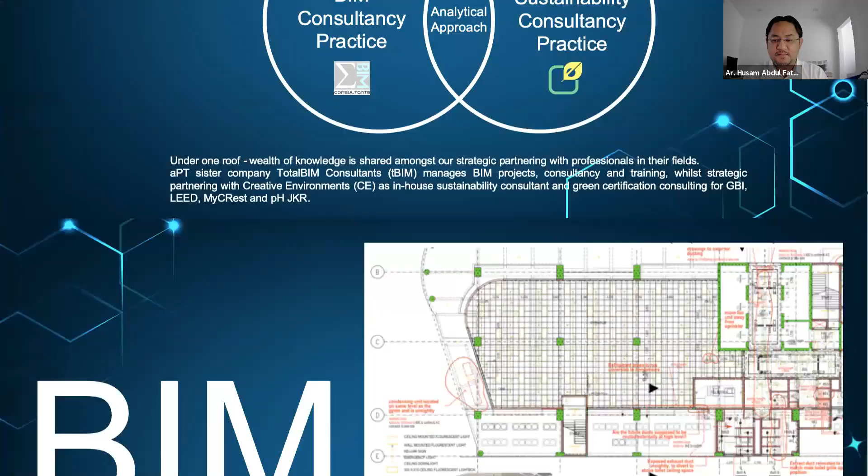So I think everybody knows what BIM is. Basically, it's an accurate virtual model of a building digitalized for construction. This model is known as the building information model, so it's not so much about the model, it's more about the information. Once you have a lot of information in the model, you can use it for planning, design, construction, and operation of the facilities. It helps architects, designers, and constructors to visualize things, and you can do everything.

You can do a lot of things in a simulated environment before things get built. So the potential for BIM is actually enormous, and we've been doing this for a long time. I've been doing it at least since school, and Gary said he's been doing it since 1991, and even after 20 years...

The movement of BIM in the industry is still very, very slow. So we would like to see that, if it's done properly, it not only makes your job in the office faster and easier with fewer mistakes, but it also helps speed up the projects on the field.

Now, before I start with my slide, I have a video presentation set up by CIDB Construct. It will take 3 minutes, so let's enjoy.

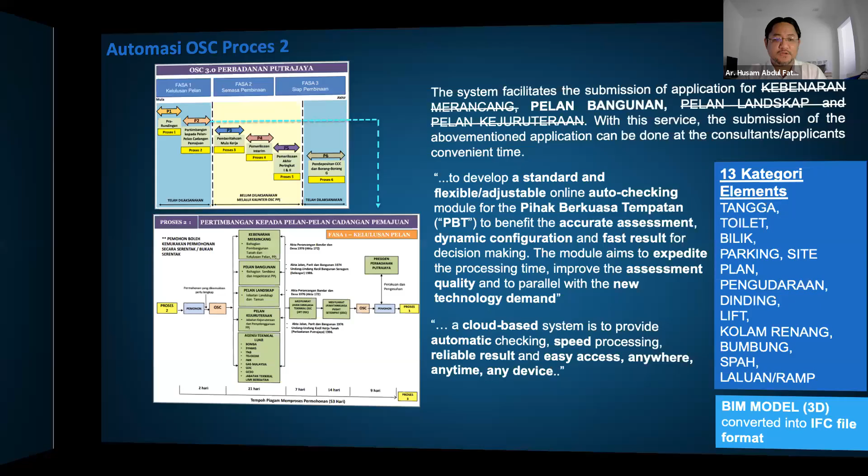So the development and programming of the NBeS system is basically looking at tapping into the OSC process. There are 6 processes in the OSC system, and the BIM e-submission is looking at only one section of the whole process, within process 2.

In the initial stage, there was a meeting that was done, a full workshop. We were not involved, obviously. And 13 categories from the bylaw were picked out for it to be tested.

But once we developed the system, we basically expanded it, and I think we've covered the entire of UBBL 1984.

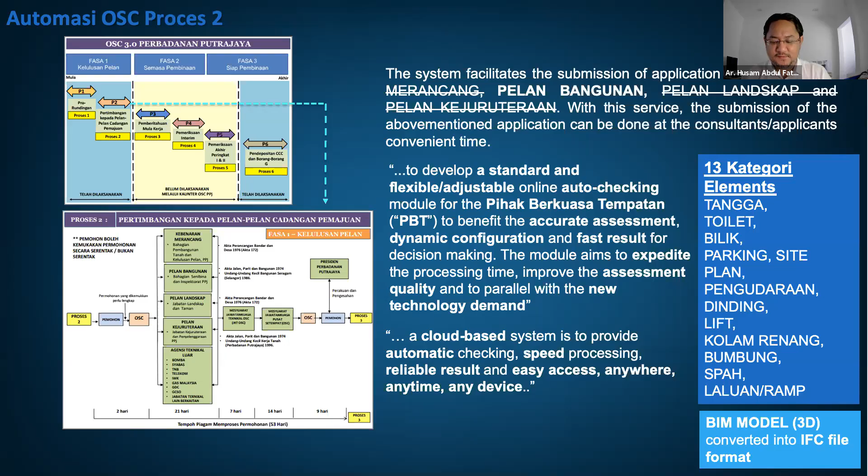So the NBeS system is focusing only on process 2. And in process 2, you have the planning submission, land matter planning, building, and everything else. But because most of the other parts, although they wanted it all to be digital, it's very difficult to focus. The direction given at the time is only to focus on building plan submission, looking at building department and also fire department.

So this is largely looking at the Street, Drainage and Building Act and also the Uniform Building Bylaw. It started off with 1984, and then we expanded it to 1986, 2012. We are also in the pipeline to update it to the latest version of UBBL once it comes out.

So you have the plan bangunan, that is what we are looking at. We're not looking at any other things.

But the provisions from the planning will actually be included in the submission of the building plan. So there will be items like how many car parks you need to put in, what green area you need to provide, and whether you need to provide spaces like tadika, surau, and all those things. All of the requirements that the project will have during the planning stage will be embedded as data into the model, and obviously it needs to be modeled. The functions of the system will check against the data that has already been given during the planning stage, and also all the items embedded into the UBBL for the building plan assessment and also for the fire checking.

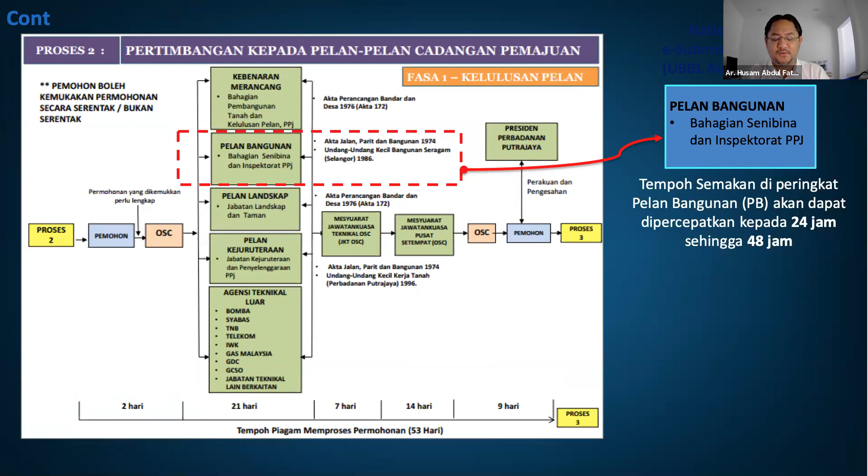So since 2017, what they're trying to do is, once you put the model into the system, the model gets checked automatically, and you'll be able to get your result out within 48 hours. When it started, it was 100 and something hours, then they tweaked the system and added some capacity, all those IT stuffs. Eventually, we had one project we tested that could actually get results within less than 48 hours. That was very, very impressive.

In terms of the documents being reviewed, obviously in the beginning we went on the more basic, or easier buildings or purpose group. We focused on single residential, then we moved into residential buildings for high-rise without any commercial attachment. So basically, we reviewed the UBBL, the standard 1184, and later we also included 1183. For other areas, we also reviewed against their planning requirements and also the fire requirements as well.

In order for us to do this, when it was first rolled out, the test pilot was given to 4 local authorities, which is PPj, MBPJ. They wanted the big PBTs, and they also wanted a smaller city, so we welcomed MPKj Kajang and also MBMB, that's Majlis Bandaraya Melaka Bersejarah. For all of these PBTs, they selected a project and we ran a test project, an actual project, as a pilot. All of this process has already been completed, and CIDB is in the process of coming out with a report for the industry and also the public to review.

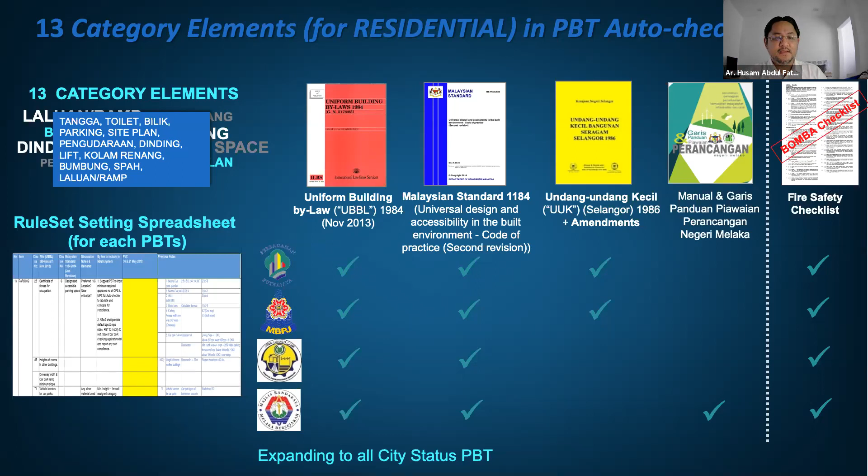Now, how do we do the testing for Total BIM? Basically, we focus on the modeling side of it. We check the requirements, we tell the programmer what the requirements are, and we model it based on that requirement. So what the programmer does is use the words from the UBBL and turn that into sort of like a word search kind of thing. Basically, that's a simple logic of the system.

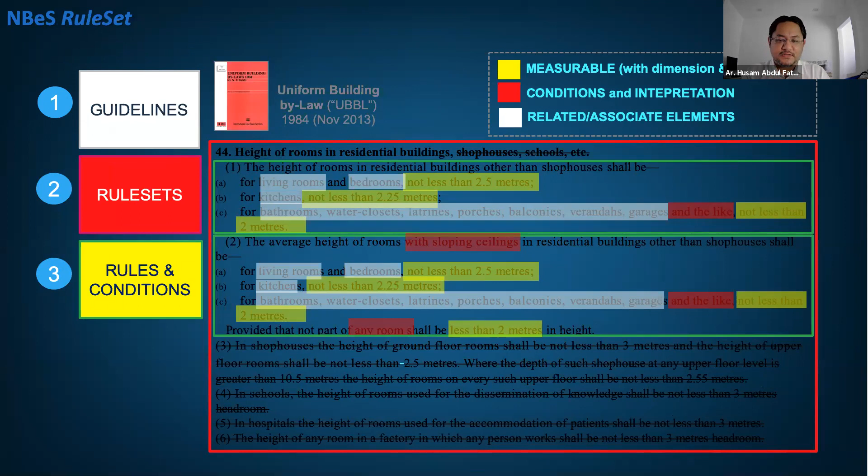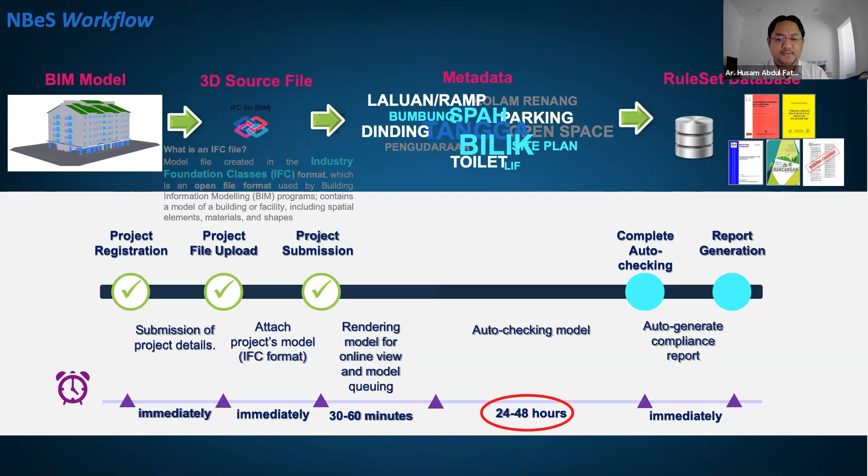And then we'll do the auto checking, and the report will be generated in a PDF format. The time is expected to be completed within 24 to 48 hours.

So you'll get an ugly looking building like this. The color is obviously off because it's not ours, the system basically sets the color to the model. We're trying to look into how to make this look as how it was designed, because this is what the local authority will be seeing once the IFC model is regenerated into their system.

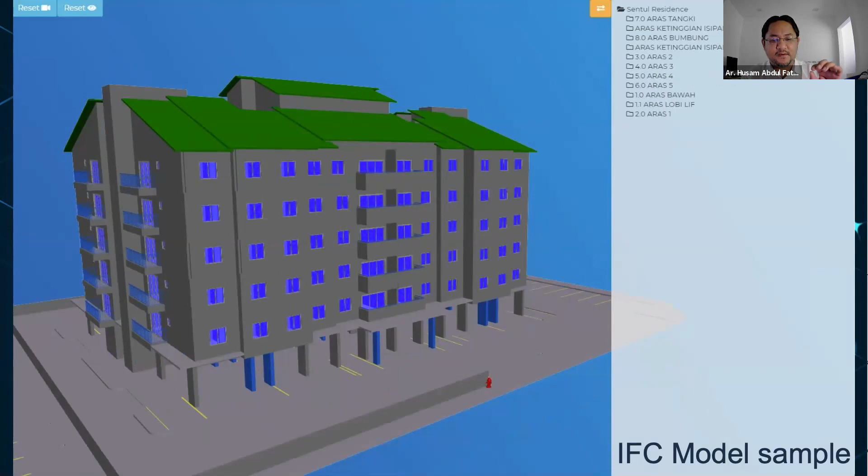And this is a model that will be tested. All of the components are actually selectable, and then in the system it will come out red and green. The ones that failed, you can actually click on them, and it will go into the page where it shows where the error is and which location. It will highlight what value is required based on the standard and what value is given. Very crude, but I think it can work.

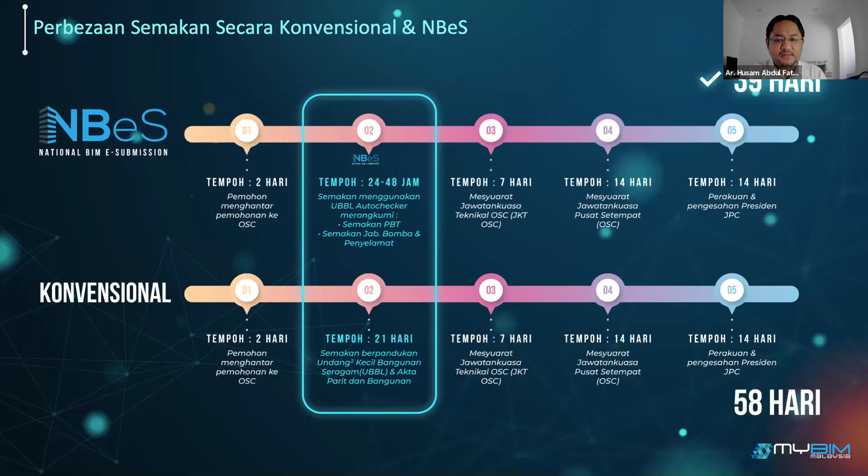And they're looking at reducing the process to more than half if it's possible. So the benefits of this is that you get to really expedite the checking process.

So what NBeS does is that it allows the PSP to run the model test on their own. And then once the model has been cleared from all errors based on the computer checking, and also the ability of the PSP being a competent person who knows the requirements, so he's certain that the design is compliant. The system says it's in compliance, and then they think that they're ready to go and do the submission.

The submission at the local authority will actually rerun the test again, and then they will make sure that the result comes out the same. And based on the discussion, a certificate will be given based on the computer testing, and that will be your building plan submission and your approval.

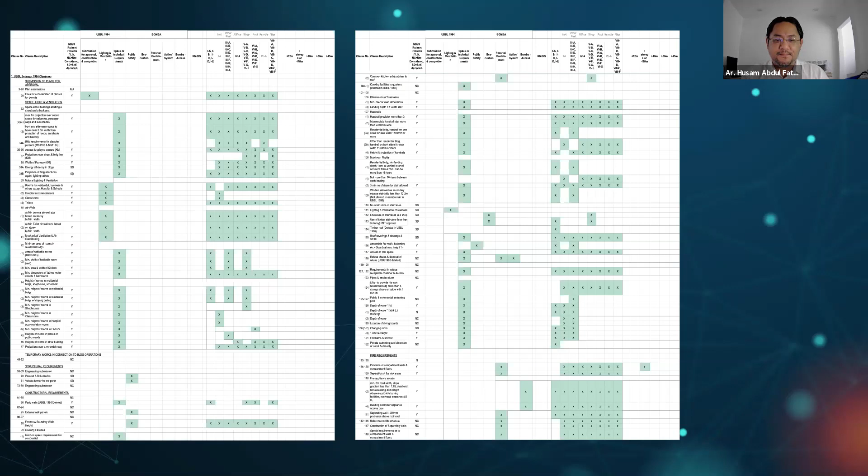Those PSPs who are already BIM capable, it is just a change in their standard only. But for those who are very new, who are not yet well-versed in Revit, they will be struggling a little bit, because you really need to be at a certain level of BIM competency in order to use the system and the template. But once you get to know this, you'll be able to see all of the clauses and all the compliance criteria already embedded in the UBBL standards, and also the building guidelines and planning guidelines.

And it can be applied to a broad-based building type. So we've tested single house residential, terrace houses, shop lots, double-story, three-story, single staircase, double staircase, multi-residential. We've also tried low-rise commercial building, high-rise commercial building, and we're going into mixed development now. So although the system is still very, very new, it is also very, very robust.

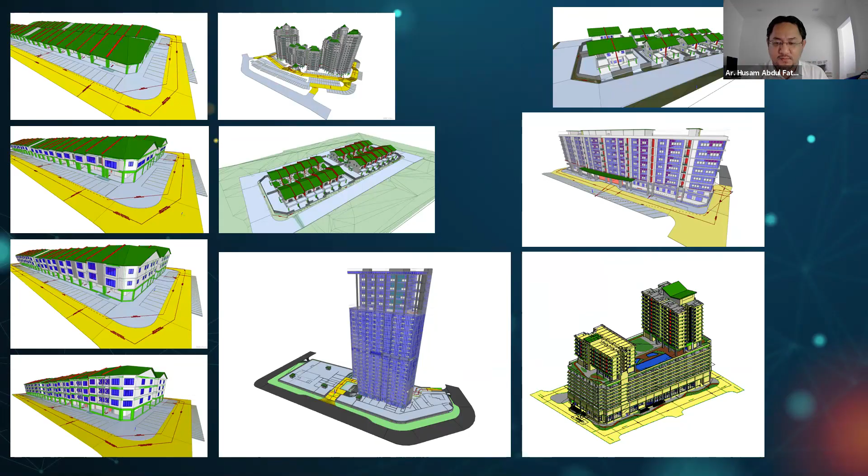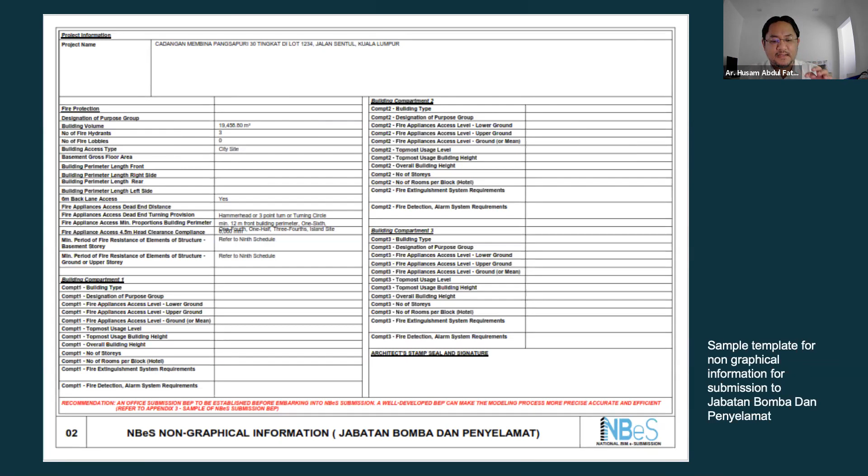And what you'll need to do is, inside Revit, once you've got the template, you need to fill in data. These are non-graphical data. So you basically take from your UBBL, from your planning approval, from your building plan requirements, and then you have to key in all that information like number of car parks and all that. That will actually be used to reconfirm your model. So there's a few of these.

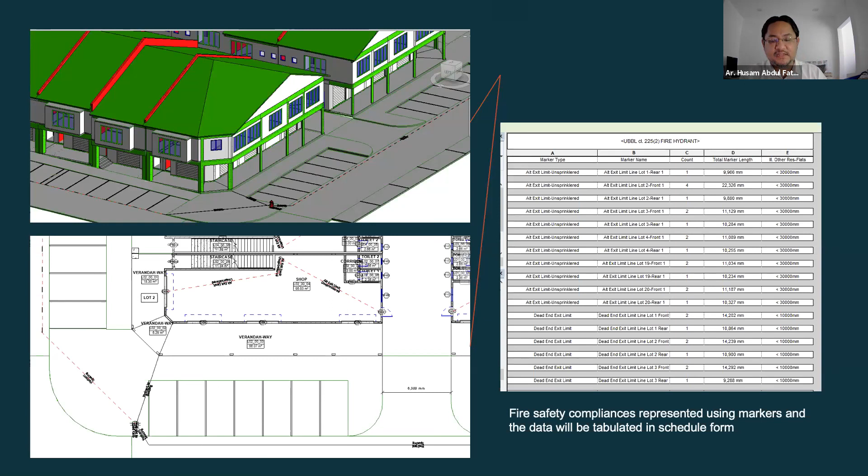And the system automatically generates schedules. So you can know the number of hydrants, the distance between hydrants, the distance from the hydrant to your building. Do you actually have that maximum 30 meters? What is the distance of the hydrant to the center of the road and stuff like that? Everything will come out in a schedule that in the office, the PSP can open up and review whether the information is correct or not. Because PSPs don't really do the model, so they would rely on the technical people.

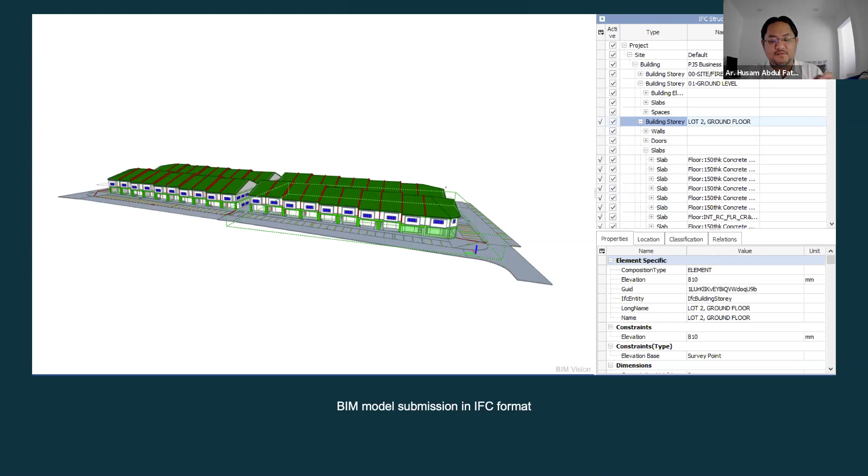And you will also be able to check on the slabs, the actual components, and what things are. So we have already assigned in the template all of the IFC formats, so that once you model with our template, all the information that you need for the checking is already embedded. We also check on site compliance. You can check the height, you can check the building volume. You need the volume in order to assess the fire appliance access.

Then you can do the calculation of your perimeter. Then you know what is the fire appliance road, whether you need 1/6, half, 3/4 island site. So all of that will be calculated within the system. And if you don't comply, then it will come out red. Not in Revit. In Revit, you will check it in the schedules, and when you test it in the NBeS system, it will come out red when it's non-compliant.

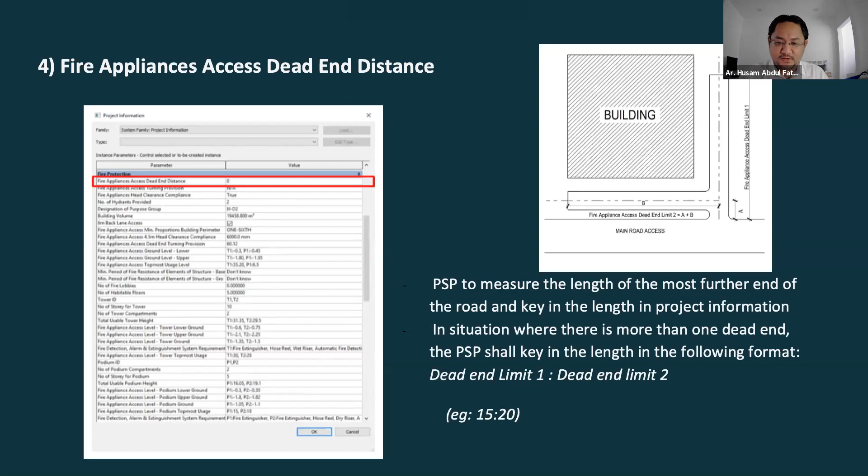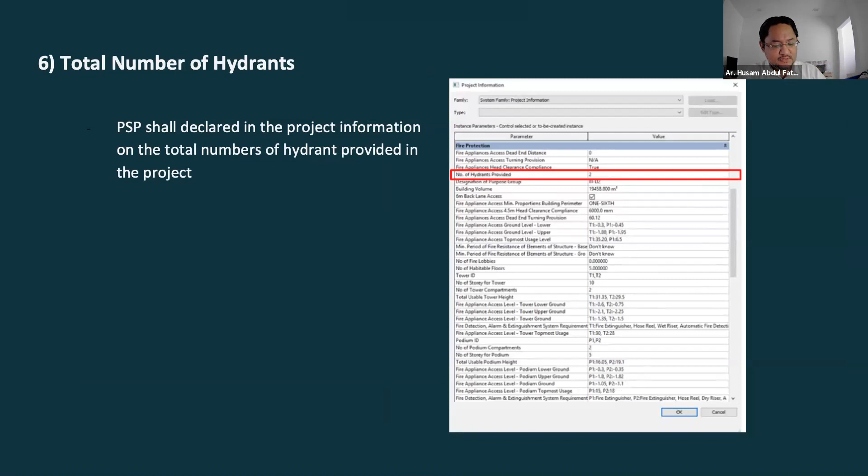So things like you need to do a cul-de-sac and all that. Total number of hydrants, and this can be translated into your Bomba submission, the form that you have to fill in, the spacing, the distance, the travels.

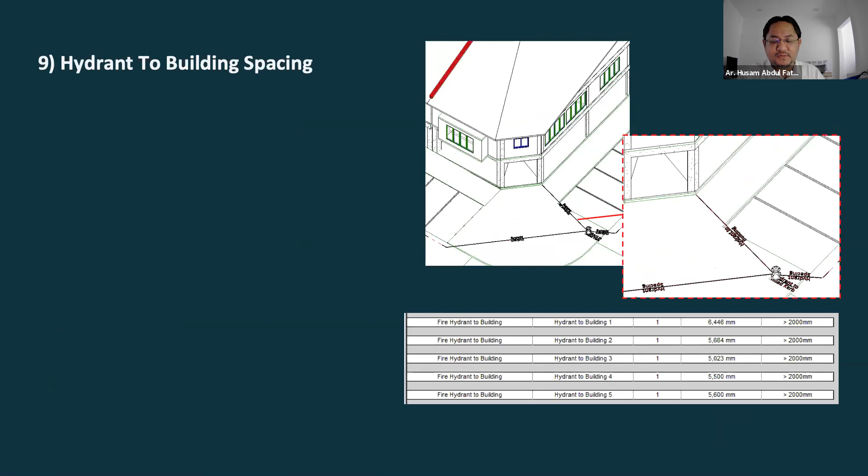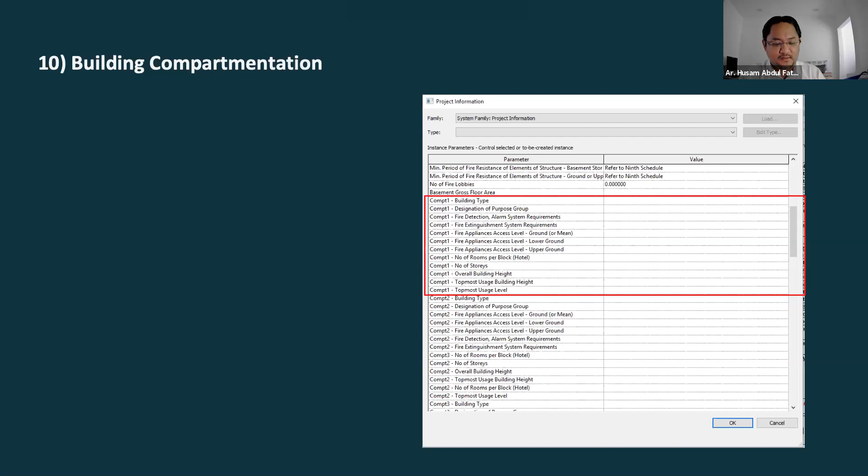Hydrant to curb, hydrant to the building, and also on building compartmentation as well. So once you model, you have to consciously, this is not an intelligent system. The PSP or the person who actually models in Revit needs to actually know what they're modeling. So if that wall has to be a compartment wall, then select the proper family and make sure that it's the right one to be there. But if they actually do it wrong, once they run it through, the system will spit it out and say that, nope, this wall has to be a compartment wall.

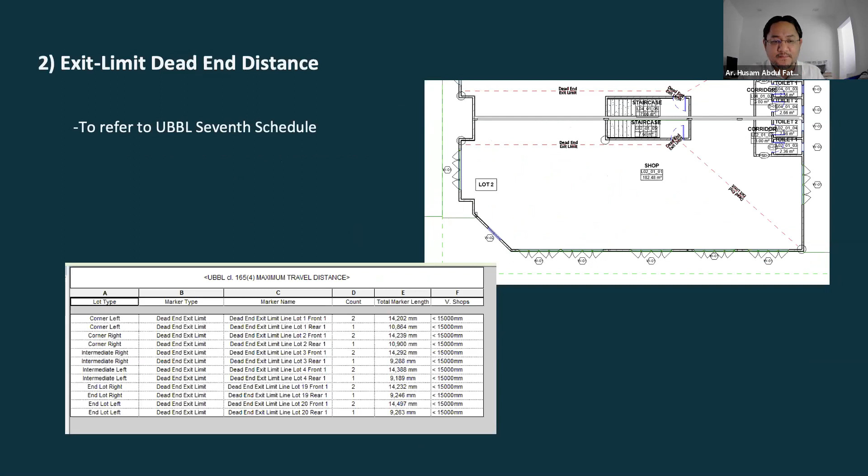Okay. Things like back lanes, separating walls. We can also do dead end limit, alternative, room spaces. You can highlight all the purpose groups. It will also calculate for you your occupancy load, your exits, your capacity of exits, your requirements for fire detection, alarm, extinguishments, and all that. So it's a broad-based scheduling, but with more or less conventional method of doing the models.

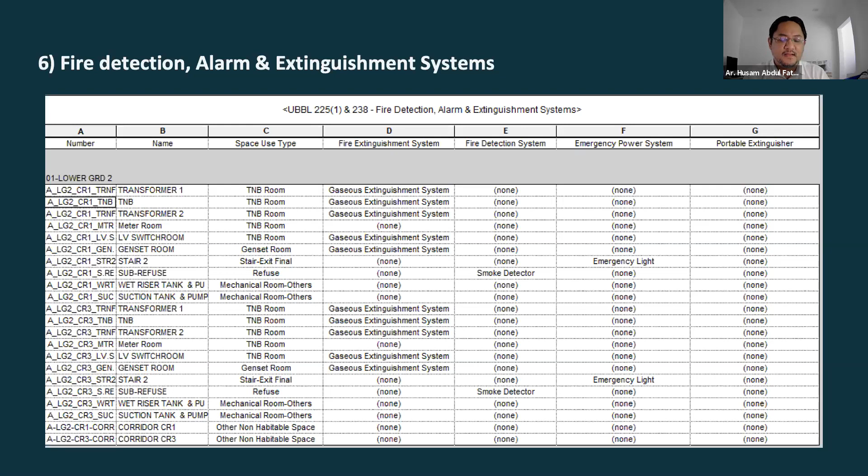So the challenge is basically to ensure the reliability of the NBeS system. Okay. Because that system needs to actually be commissioned. Somebody needs to actually look at whether the system is correct or not, so that the result comes out correct. It will also be a demand on the system. It needs processing power. It needs computational power. It needs time to run. It probably needs storage space for it to store your data and all that.

And PBTs think that they also need to learn Revit. So we do have the PBTs that are already on board. They are very positive about this. There are several other PBTs that are also looking into exploring the potential of the system.

And on the PSP side, is the modeling error that always happens, especially when the model is not being monitored properly by the office. So the BIM execution of the office has to be very, very correct. It needs to be done properly. It needs to be done with a certain level of quality and standards in doing a BIM model. And most of the time, you don't have competent BIM operators. You have people who can operate BIM, but they don't understand the system on how it actually works. So even if we give them the guidebook, they still need to have some level of training in order for them to actually be able to model something that can be checked within the system.

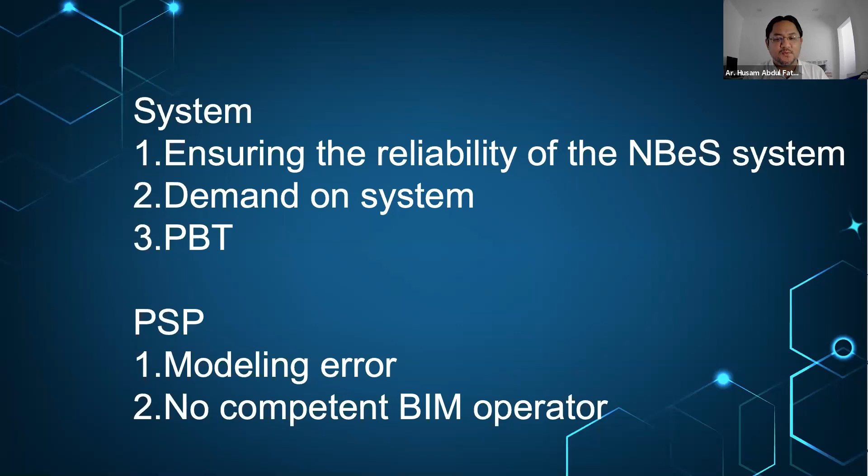But then you have the option of actually using the model that you have already created for your project and putting it into the system. Even if the PBT still requires you to submit a normal conventional hard copy, at least you can use the system for your own internal checking. So I hope you are interested and excited as much as we are, and we're looking at finalizing the system, and hopefully we can roll it out to the public very, very soon.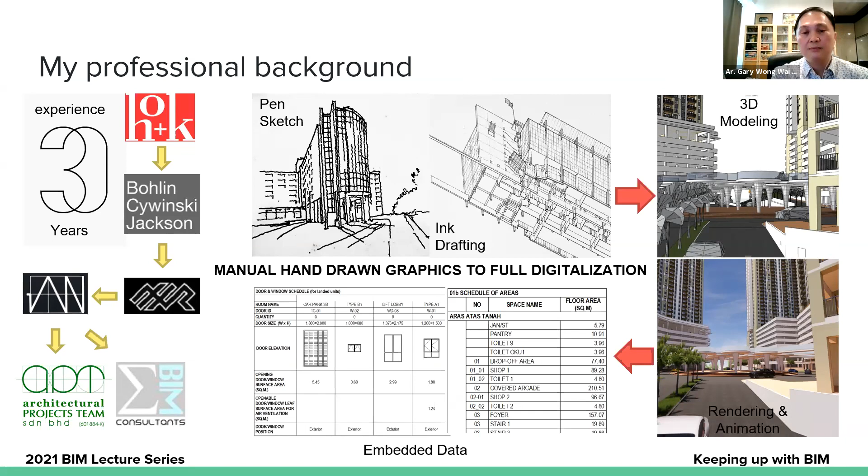So he encourages us at the office to pick up computers and use them to full capacity in our design and also in submission and presentation and so forth.

Okay, I will start with, I think, Gary, yeah. When people were moving from pen and paper to AutoCAD, you jumped straight to BIM, isn't it? Yes, yeah.

So during that time, of course, companies would start a CAD template. A CAD template helps us to mitigate this frustration. Now we are facing another frustration, the BIM frustration. Well, what are the BIM frustrations that we always face? I'm more interested in what the cures are, because these cures give us relief in our day-to-day work.

So my advice to all my staff is that the more you use it, the easier it becomes. And the easier it becomes, the less frustrated you are. The other thing is BIM mentorship. We must have somebody who is good, who can mentor and also guide. So it's like a master and student relationship.

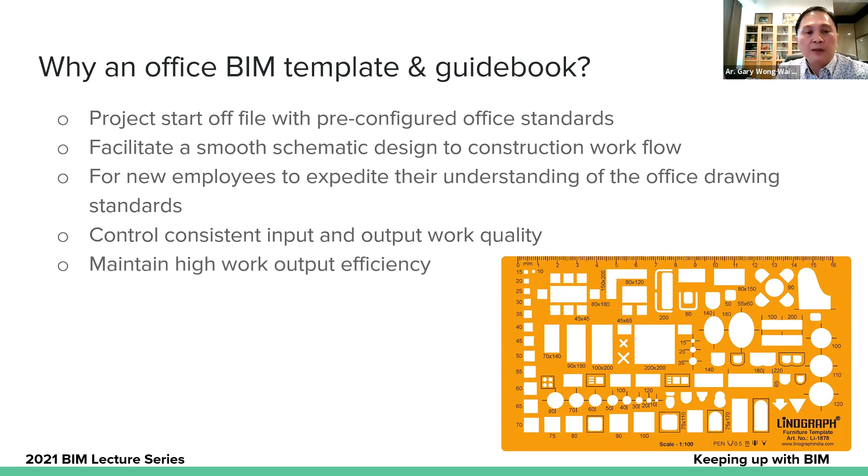And of course, with consistent use and understanding of how the template works, the work input and output can be controlled. So every time you output your model or your design, it is consistent. And then, of course, maintain a high work output efficiency. Basically, we don't want to dwell on slow modeling and slow output of work, which can delay our project and our deadline.

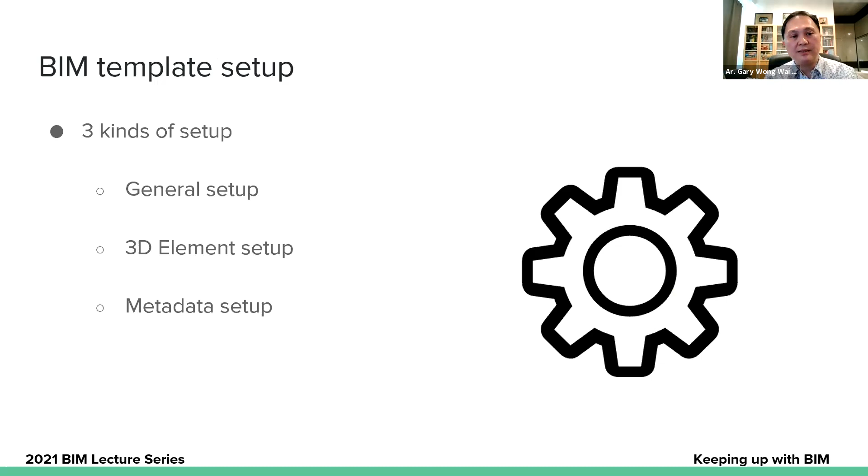Now, this BIM template I can divide into three kinds of setup. One is the general setup, secondly the 3D element setup, and lastly the metadata setup. In the general setup, basically, it's just keying in the standard PSP information, the office information, because this information is used in every project. You only have to do it once, and every time you start a project, the information is already pre-keyed in.

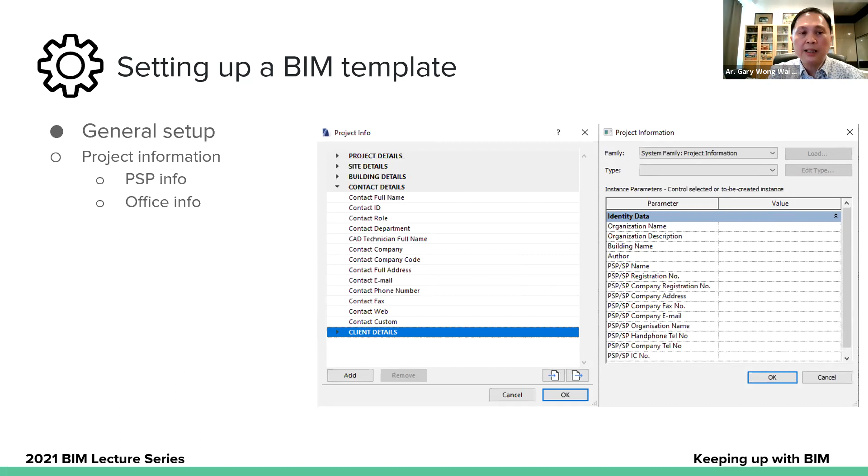Secondly, it's about setting up the working units. Thirdly, like any other CAD software that we use, we have to determine all the line weights that we want, because it's going to be output as hard copy, and whatever is preset will produce the line weight quality that you want issued to our client and consultants. Besides line weights, we also deal with line types and the colors that we use.

Of course, if we use Revit, we don't look into that. However, we have been so used to doing CAD. Colors are very important to us when we do modeling.

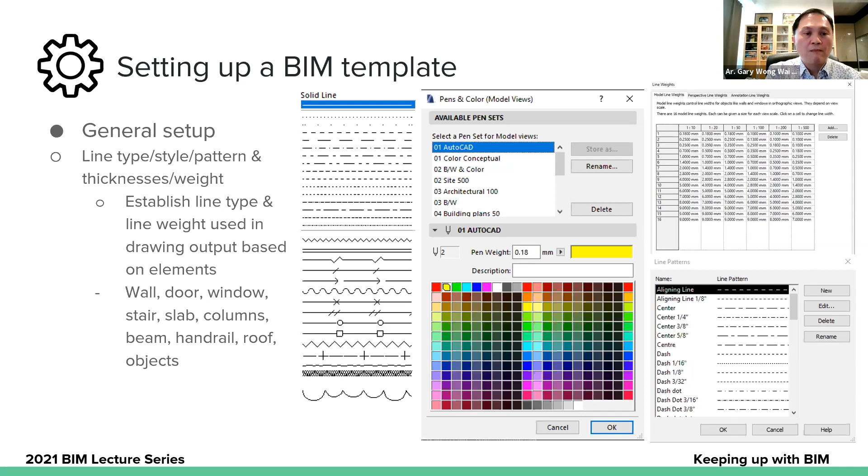The other general setup, I think, is also that we need to establish the hatching styles. By hatching styles, we mean the style representing certain materials. And in terms of fill types, there are actually three types of fill that we normally have to understand: a sectional fill, a cover fill, and a drafting fill. So you need to establish all these three different fills to represent your drawings.

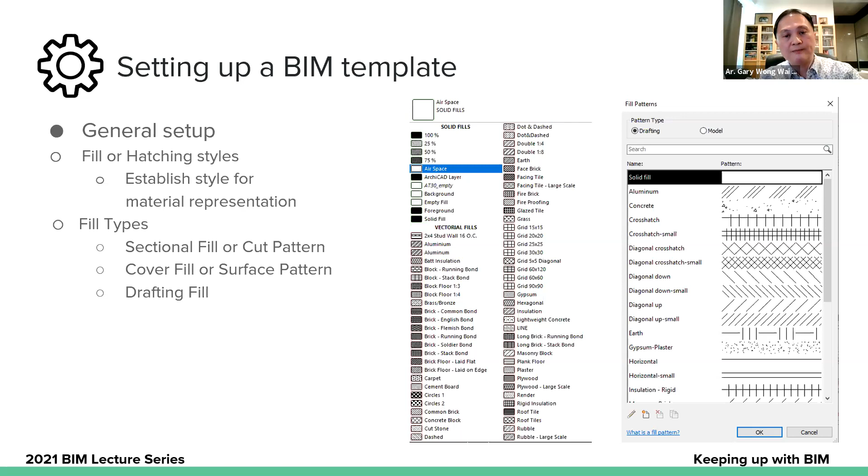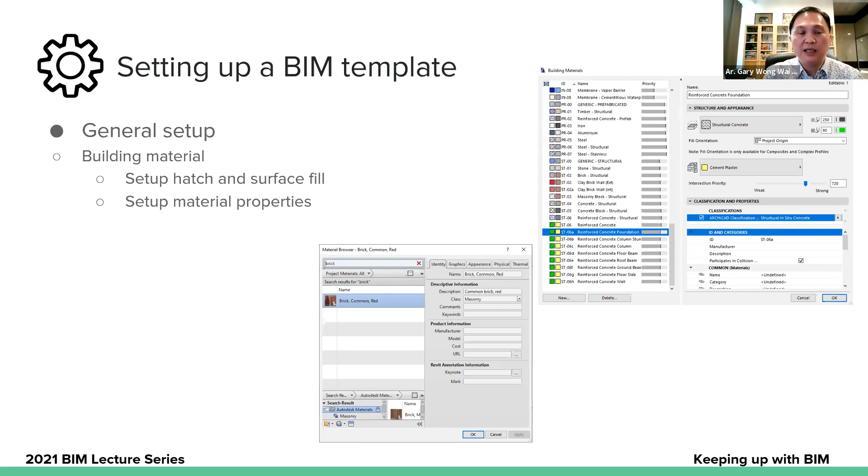The next general setup is actually the building materials. So we have to set up different kinds of building materials with what kind of hatching and what kind of surface fill, because all this eventually will be represented in 2D, and also to facilitate simple setting out without much extra work that you require to prepare for building plan submissions. And also setting out the material and properties allows you to just point out the materials, and your specification can be automated without keying it in all the time for every drawing.

Next is actually the story and level naming styles that can be set up. Marker level symbols for the office can be set up. So there are many ways that you can actually prepare. Some options are already given to you within the authoring software. Some of them you have to create your own if you want a unique way of representing certain elements in your drawings.

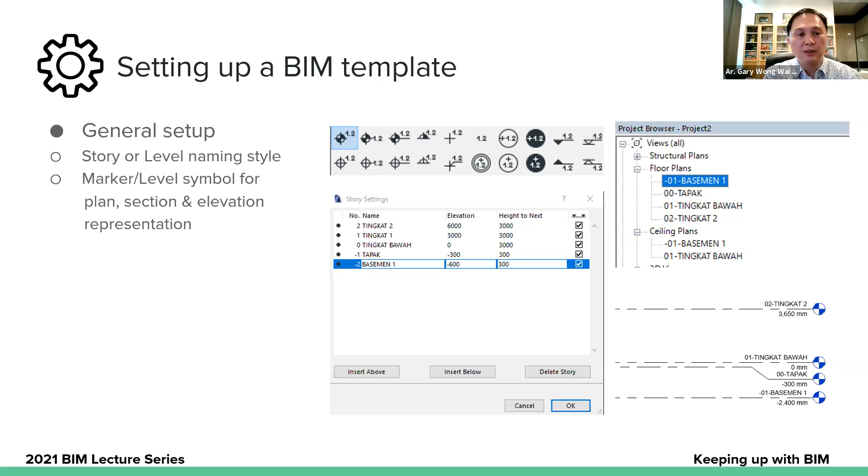Next is actually the layer naming. Layer naming is normally used in traditional CAD software. Until today, we still use layering. It actually helps with controlling what items you want to see and what items you don't want to see. In Revit, of course, we deal with the view template, and you can actually set up those view templates with different kinds of combinations.

One example I've given here is that sometimes you want to prepare a site setting out, whereby you need to prepare drawings to issue to the contractor to set up the grid lines. So without deleting anything, just by turning off certain layers, you can make that presentation and those drawings with minimal effort.

Next is actually the interior plans. For example, some interior plans whereby we don't want to see any dimensioning, so you can actually use the layer system to turn it off. Reflected ceiling plan and bomba plan. Bomba plans basically are black and white drawings with minimum dimensions related to the bomba drawings. Okay.

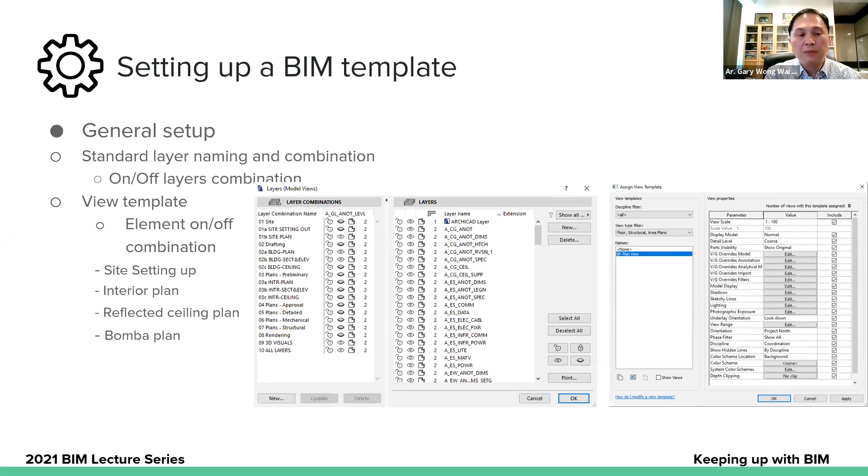Pen color setups need to be set up, especially if you're using Revit. Revit needs to have certain colors for certain materials. So you need to set it out. You need to know what the RGB values are. These RGB values can be in your guidebook to represent certain materials.

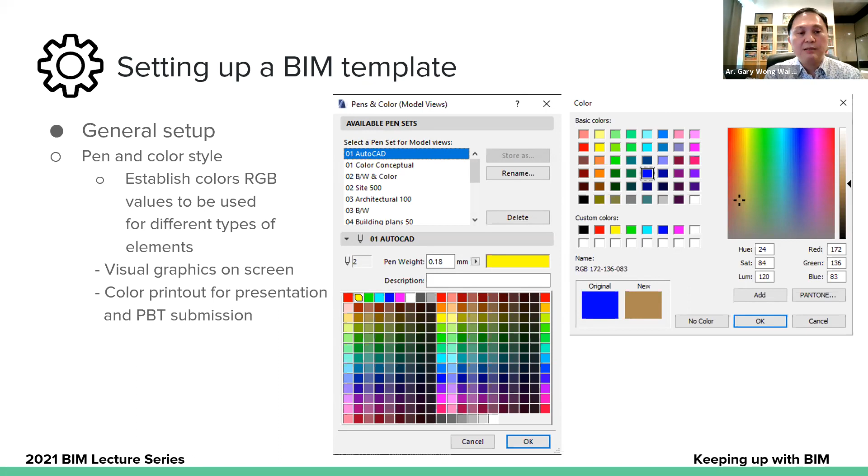Next thing is that you need to consider setting up the zone categories. By setting out the zone categories based on residential, commercial, facility, circulation, service, and parking, you can do schedule listing in a design based on those categories. Especially when you design a mixed development, you can group your schedules based on the categories.

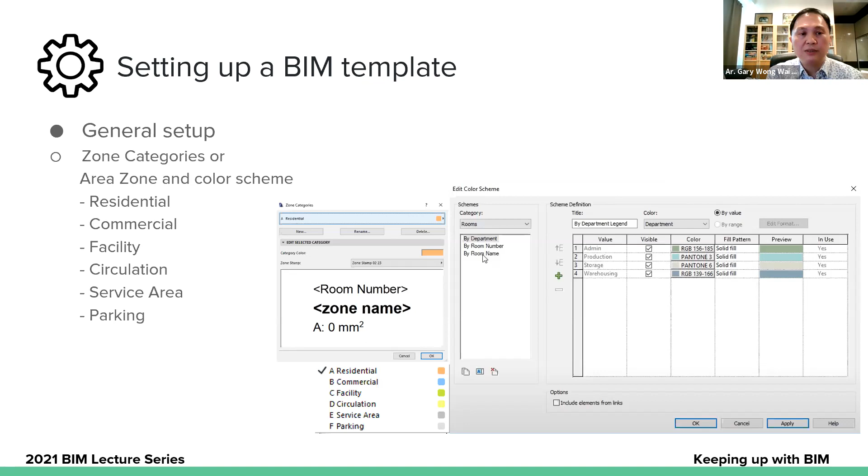Okay, the next thing I want to talk about is the graphic override combination, or the view template style, which is how the things that you model will be represented, and this representation is what you want to see when you print out. I'll give you an example. When you do your drafting, this is basically what you want to see in your drafting.

So by changing the way the drawings and models are represented, by changing the visual styles, you can do it for presentation purposes. Then for building submission, by just switching to a different mode, the colors that you have set up automatically switch to the material colors which you intend to use for building plan submissions.

For the purpose of Bomba, by switching off certain styles, the colors of all the fire-rated elements will be converted to red. And for construction, as usual, all the colors are not necessary, and they can be turned off automatically by the switch of a style. Similar to S&P.

For zoning purposes, representation. Basically, this visual style is to understand how the office creates some of these drawings from a single model. So by controlling these styles, you can present the drawings the way they're supposed to be presented.

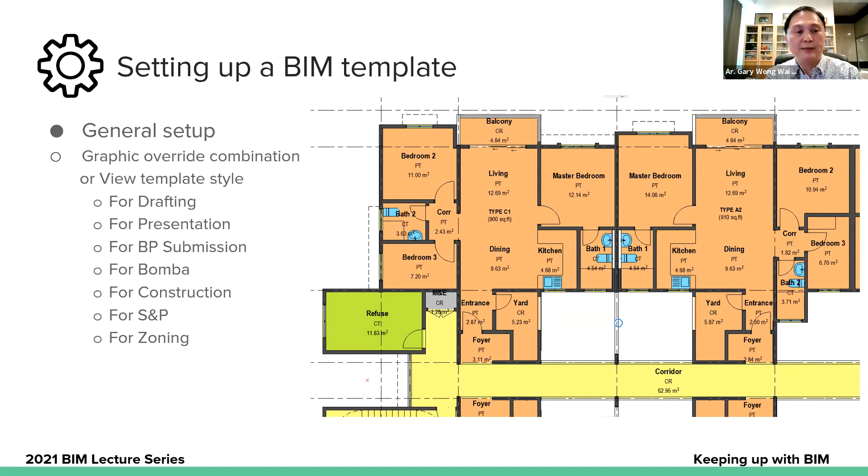Next, I want to talk about the renovation filter or phasing graphics representation style. This style normally applies to renovation works where we have an original existing building. From the original, we have to prepare a demolition plan, and the demolition plan is highlighted automatically by just selecting the material and giving an instruction that this particular wall will be demolished. And when you switch to the presentation mode, it will turn dashed blue.

And this is the representation for the change plan. New walls will appear, and the new walls will be in red. And this is the mode in which you will prepare your layout for submission to the local authority. This is actually your new plans that you will issue for construction purposes.

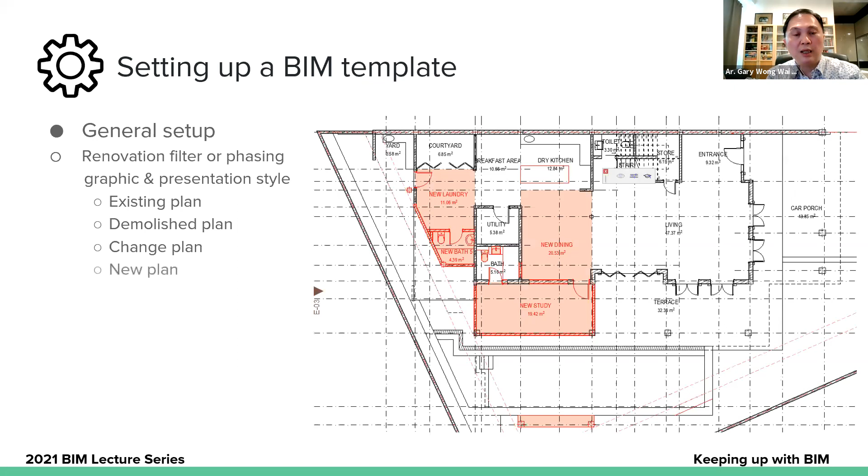Besides that, when it comes to presentation and production of drawings for printing, some of the standard things that are required to be set up are different paper sizes with the title block. And all these title blocks shall have pre-embedded information, like for example, project title, client, PSP info, drawing title, drawing number, and so forth.

And all this information, all you need to do is do it once in the template. It will be automatically printed out. You don't have to key it in on every sheet. So by presetting this, it will help you reduce a lot of time spent labeling every drawing.

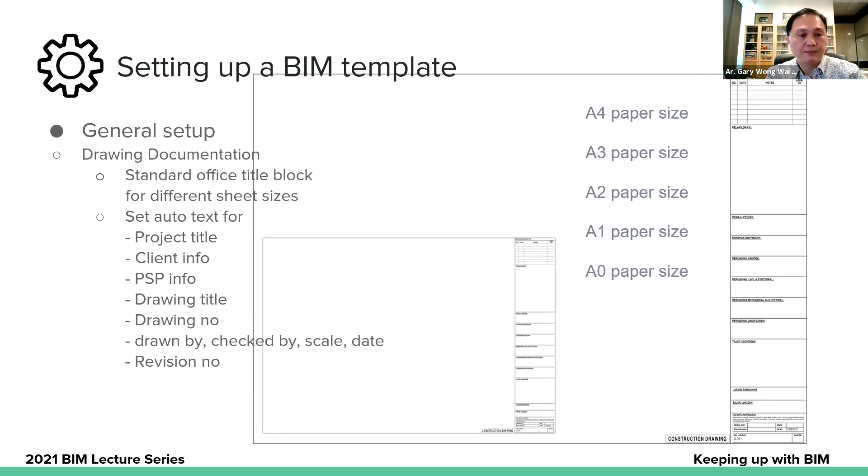Now we move on to 3D element setup. 3D element setup basically is to set up the materials that are required for building construction, from the basic building materials to composite materials. Composite material means when you have a wall situation where it has plaster and paint finishes, and that forms a composite. Earlier on, I mentioned setting up the basic materials first, for example, brick, concrete, cement, plaster. Those are the basic materials that you have to set up before you can do the composite wall assembly.

By doing this composite wall assembly, every time you draw a wall by selecting this particular assembly, it has all the information when it comes to quantity, specification, and labeling these particular materials. By clicking on this object in the floor plan or in the elevation, it will label all the information that you require before you prepare your production drawings to be issued out.

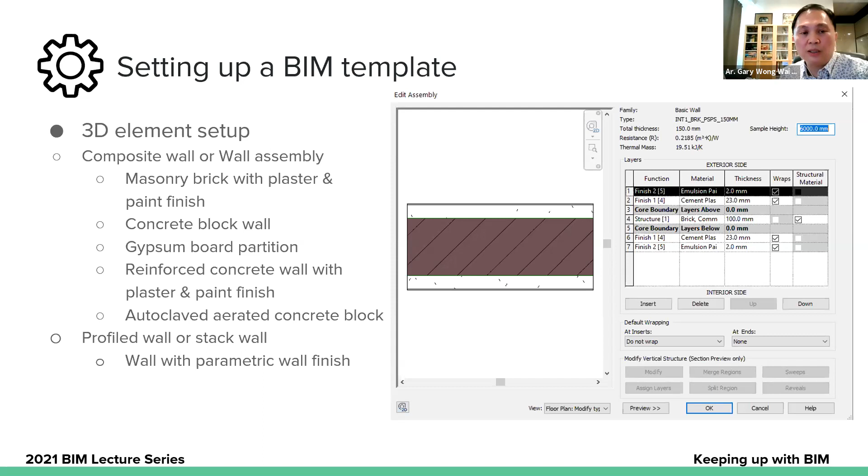The other 3D elements are similar. Part of the building elements is the concrete floor, concrete slab. Similarly to the wall, you can preset certain standard combinations that you normally use in your project. Similar to the roof that you normally use in your project.

And the 3D element setup, for example, doors, windows, sanitary fittings, Bomba fittings, furniture, pipes, M&E fixtures, landscape, staircases. These are some of the elements that you can model so that they become your office standards. So you would have a family of libraries that you can always use, and you don't have to recreate them every time you start a project.

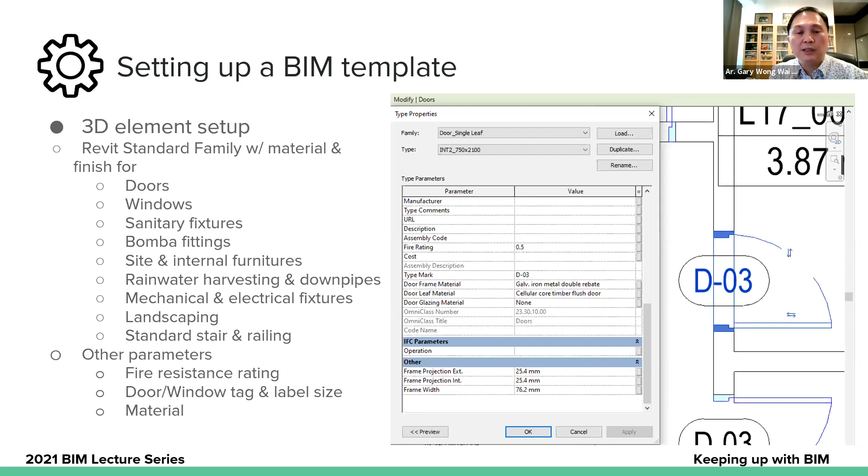Besides all this modeling that you have to prepare for the template, you may also have to consider other parameters that will help you along the production of these drawings. For example, the fire resistance rating, the door tags and label size, and also the material and sub-material used for every element. It could be, for example, a timber wood frame or a metal door frame, and then the timber wood door, and so forth. So you can add additional parameters, additional specifications, so that you can use them when you start to produce the work.

Next, the third part of the setup that you need to consider is the metadata setup. The metadata setup is more towards the production of schedules. For example, schedule of areas and finishes. You may be able to list out the materials for every space that you create in your model.

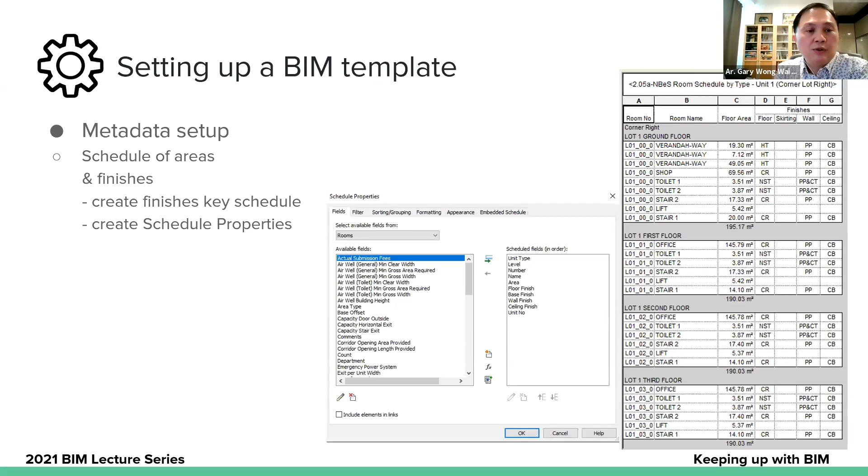You can also produce the areas automatically. So with every change in the areas and in the dimensions of the areas, your schedule will automatically change without having to key in the changed area. So all these are self-automated.

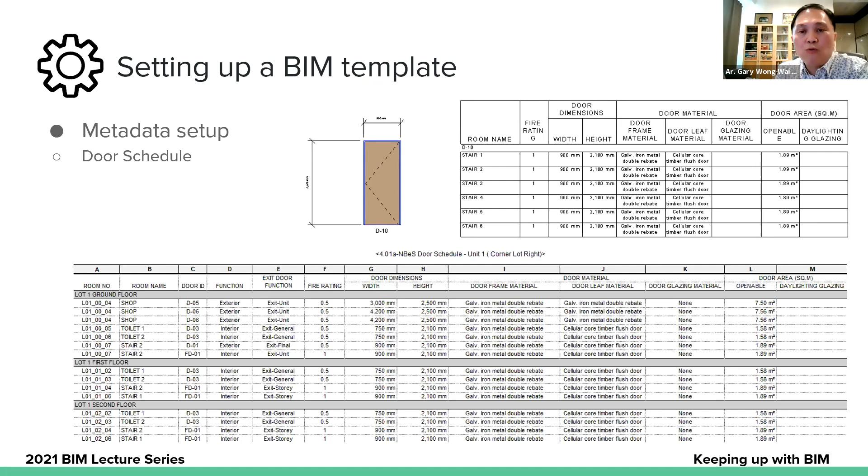Similar to door schedule, once you have got all the doors, family, everything all in place, by placing doors in the models, you will be able to automatically list out the size of the element, and also the finishes of the element without much keying in, and you can also allow or add certain rule sets. For example, for openable areas, when you create the objects, you can create a formula whereby any change in the door will automatically change the openable areas.

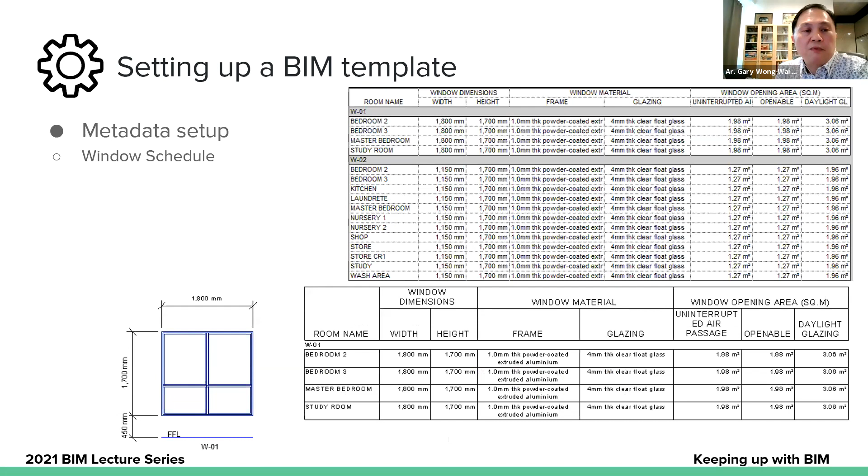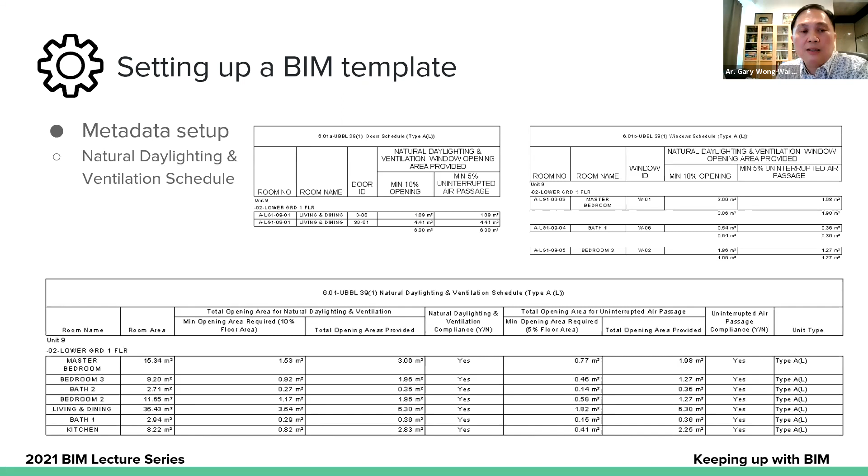Similarly for windows, by setting the size of the windows, you can generate the openable areas and daylighting areas required for natural daylight and ventilation schedules. With doors and windows combined, you can list out the natural daylighting and ventilation schedule without exiting the software to Excel and doing the schedule room by room. All this can be done internally within the authoring software itself.

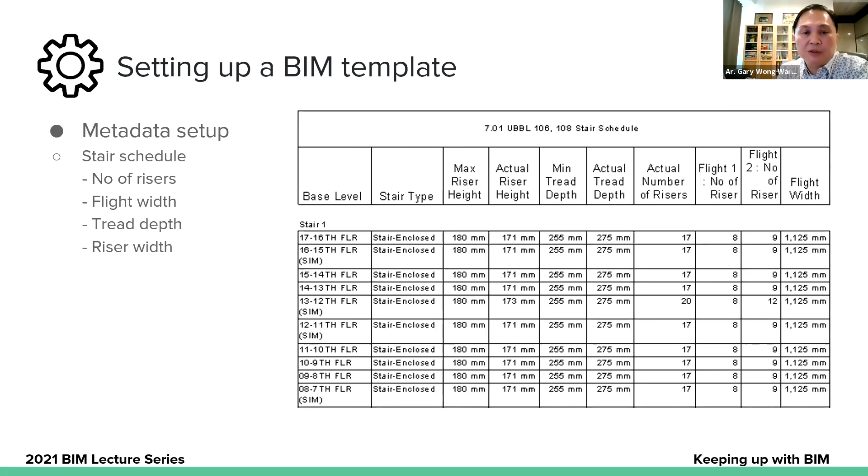For stair schedule, similarly, you can list out the number of staircases, number of risers, and the height of the risers, as we normally indicate in our drawings. But in this case, you can list it out just to verify compliance, that the risers and depth of the treads comply with the UBBL.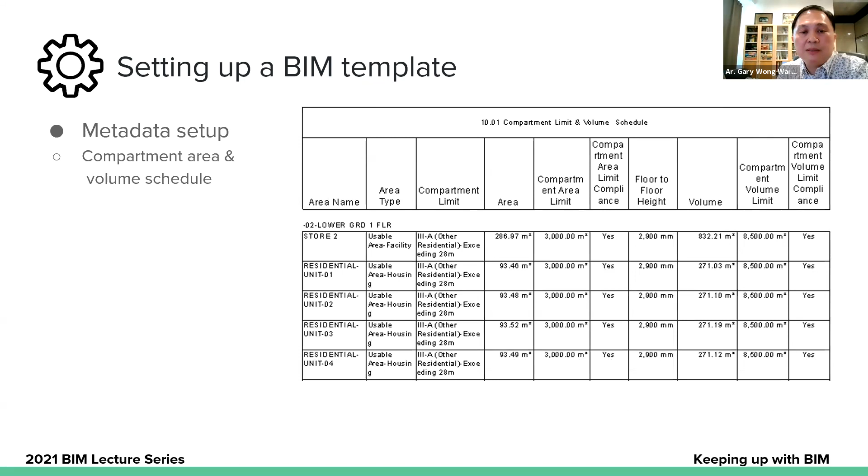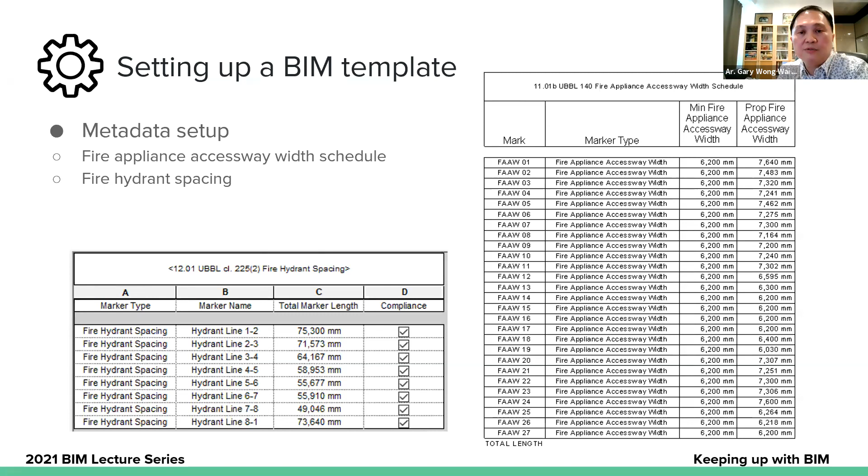Similarly for firefighting, as Husam shared earlier, for the hydrant lines, by indicating distance markers in the model, you can list out the total distance for each line from one hydrant to another, and self-check the compliance for this particular UBBL requirement.

For hose reel spacing, similarly to what we normally do in our drawings, we need to dimension the plans before printing for submission to Bomba. In terms of workflow, it's not different. We still have to draw the lines, but in this case it's a marker that we draw on the floor plan, and by drawing the marker you can total up to see whether the distances comply.

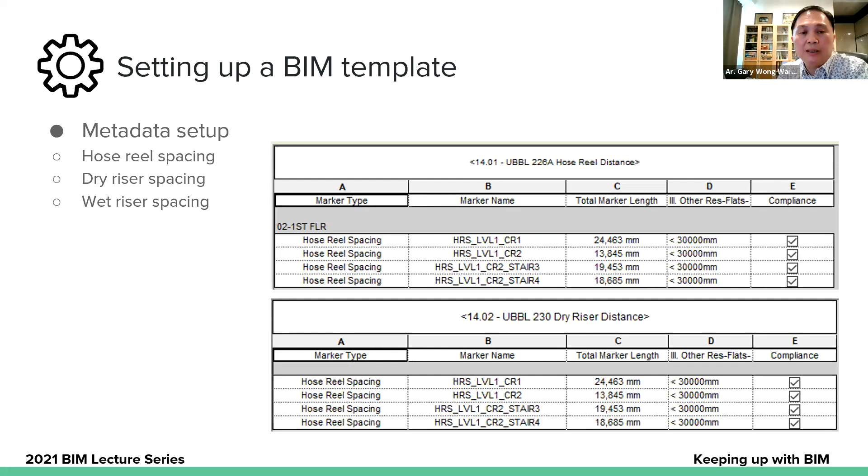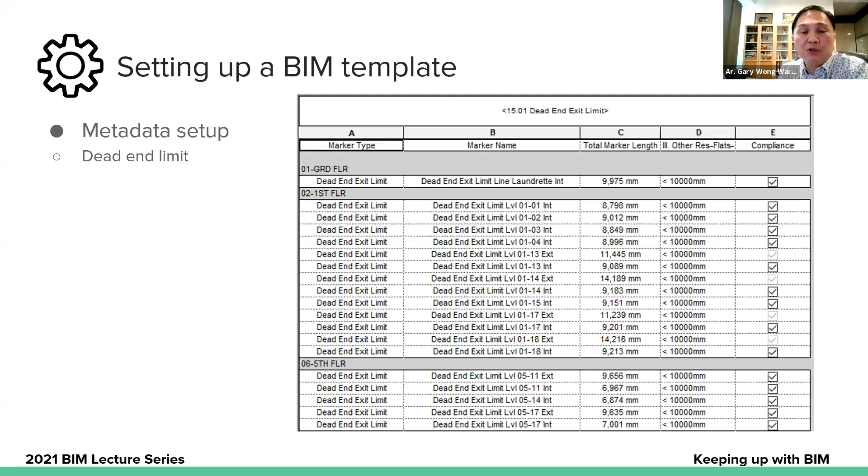Similar to dead end limit, we also draw it onto our floor plan. With this preset schedule, you can list out the dead end limit, and the distance will be shown and compared, then you can print this out to see whether it complies or not, and this can be used for submission to the local authority.

Similar to alternative exit distance for unsprinklered buildings, a schedule can be preset and listed out for self-checking and also for submission.

Similarly, the fire detection alarm requirements based on building types can be listed out space by space. Certain spaces require certain elements, so you can select what is required for that particular space.

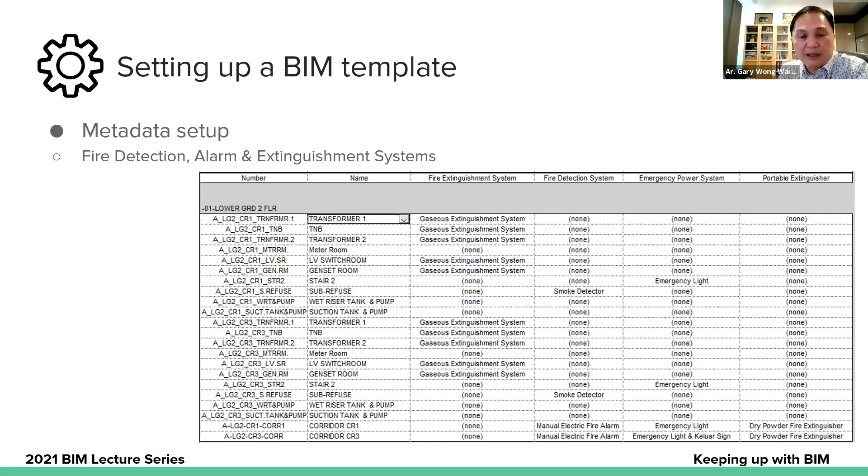So these are some of the other schedules that you can do, which we are still in the process of developing. We are looking at building plan submission fees being tabulated automatically, and even construction cost estimation, which we are in the process of doing. Furniture listing and cost estimation can also be preset. These are some of those schedules you can develop along the way when building your BIM template.

As for the guidebook, I believe when you set up this template, someone has to author the guidebook, and this guidebook will be your office standards. Every staff that joins the office has to be familiar with this guidebook. Once they start using the template and the guidebook, they should be able to pick up what the office requires of them in terms of producing, modeling, and meeting the office standards.

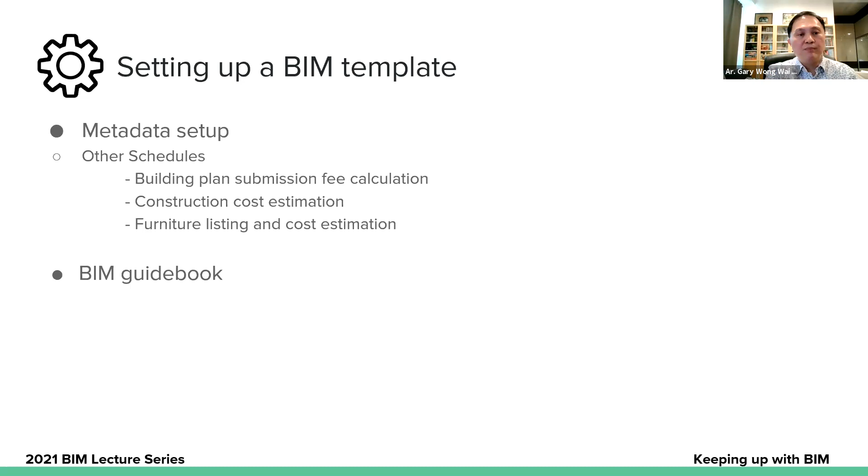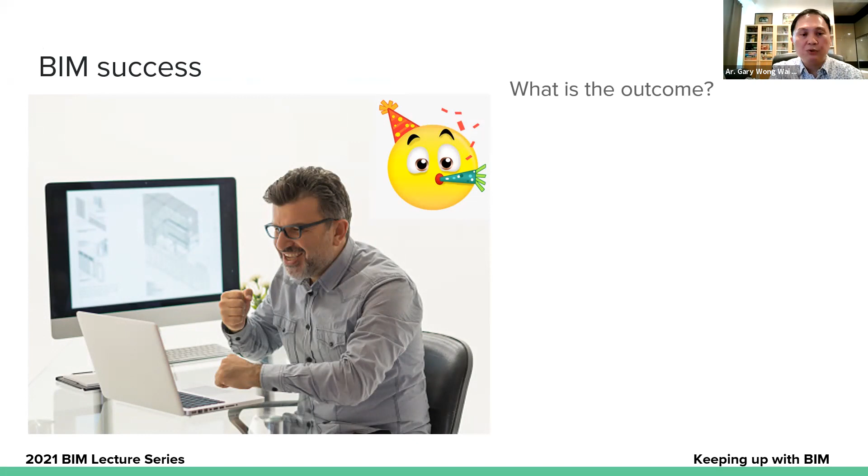So what is the outcome from this? Well, I think with the template and the office guidebook, you will be able to get out of this frustration, and you will actually be successful in terms of meeting your deadlines and quality of work, and also staff expectancy. It will also provide you with a proper way of managing your office in BIM production.

So what is the outcome? Change of staff in the office will not affect the BIM work production and quality. The transformed BIM office will not be derailed by resigned BIM staff. With this template and guidebook, even though a staff member leaves, you would still be able to maintain a certain level of competency and production quality, and you won't be held ransom if someone leaves and you're left without anyone maintaining the BIM work.

So lastly, BIM production efficiency equals more projects and more profit. This is what I think all architecture firms are hoping to achieve - by adopting new technologies, you'll be more reliable and can secure more work. Hence, the office will be able to gain more profits.